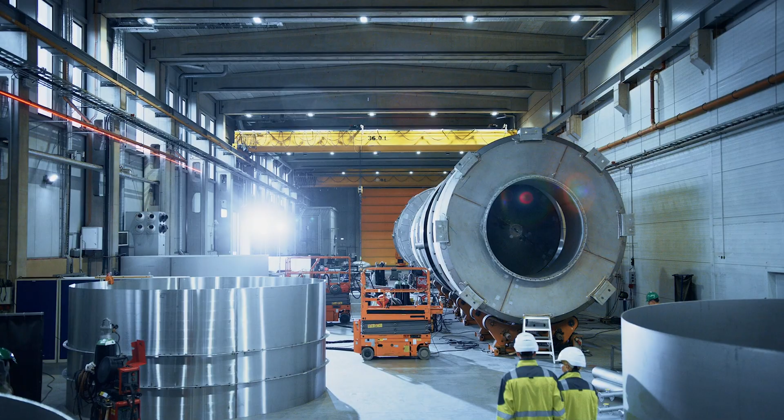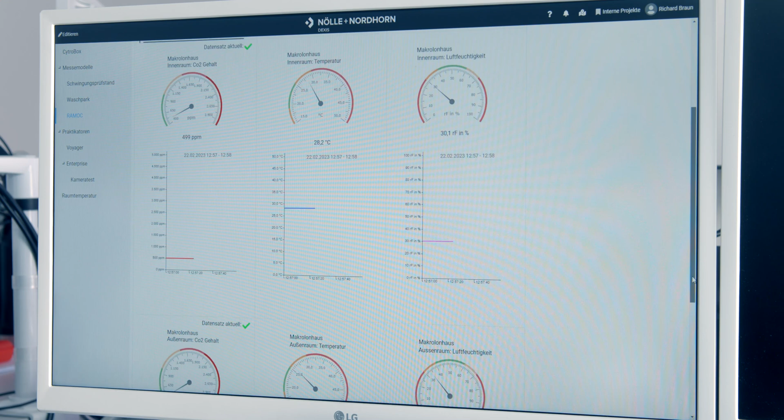Digitalization, Industry 4.0, and big data are the words on everyone's lips. But what really happens when massive amounts of process data are analyzed in companies? If you want to efficiently exploit the potential hidden in all this flood of data, first of all, you have to structure its recording and storage. Only then can a conclusive analysis be conducted.

It is exactly to this end that Nölle Nordhorn have developed their digital measurement data acquisition system, known as DEXIS, which has gone on to achieve first place in the Telekom Digital X Awards in the Digital Products and Services category. The Digital X distinction, awarded by the German Telekom in collaboration with the Federal Association of SMEs, is conferred on the most spunky and most innovative digitalization and transformation projects to come out of German small and medium-sized enterprises.

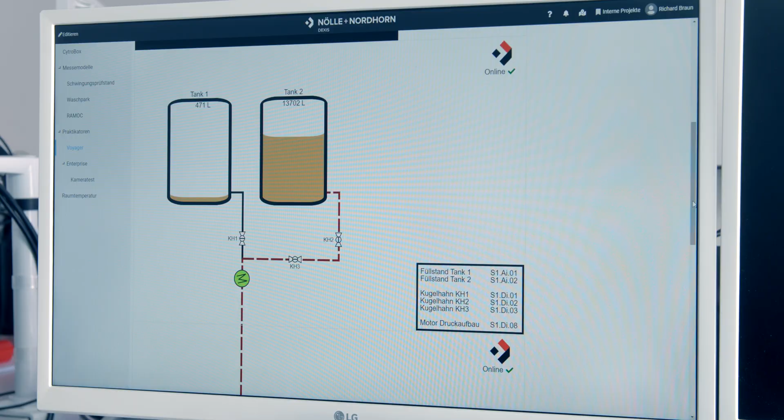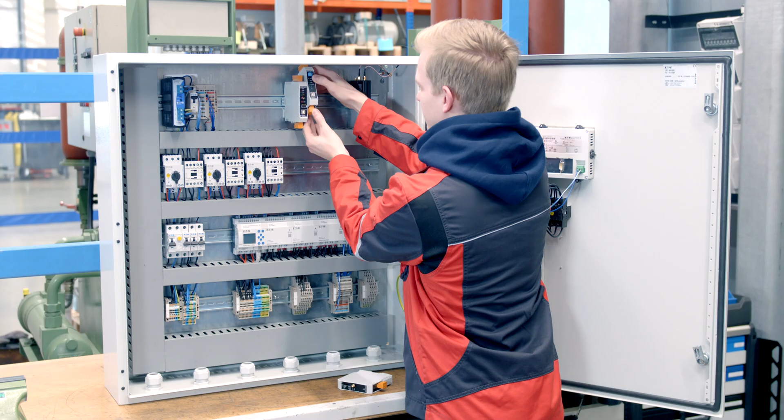The specific aim of DEXIS is to optimize all resources which are used by implementing transparent processes and their associated cost savings. The DEXIS Master Module and the Extension Modules all have digital and analog inputs, and the great thing is that signals can be looped through by the modules, which means they are available for other applications. Sensors that are already present, or any new ones, can be connected to the inputs.

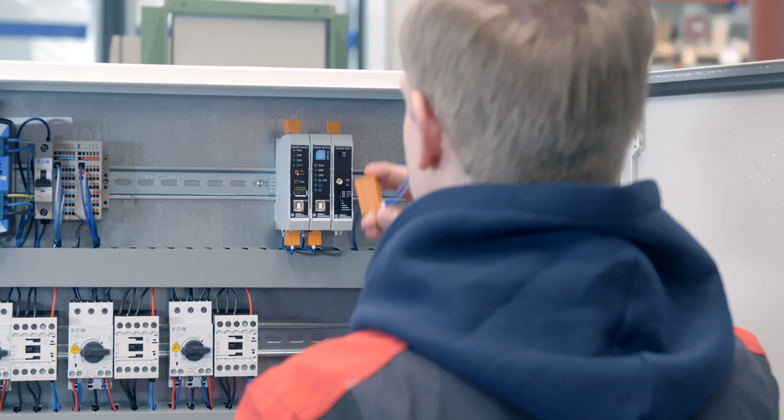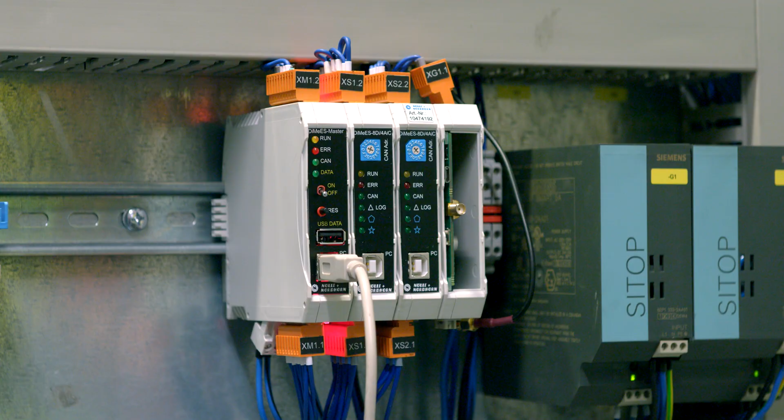The DEXIS GSM module can then send data in an encrypted format to a cloud computing platform. Data transfer is carried out using M2M, machine-to-machine SIM cards, provided by Telekom, a system which guarantees maximum data security. In this way, encrypted data transmission can take place independently of any company network.

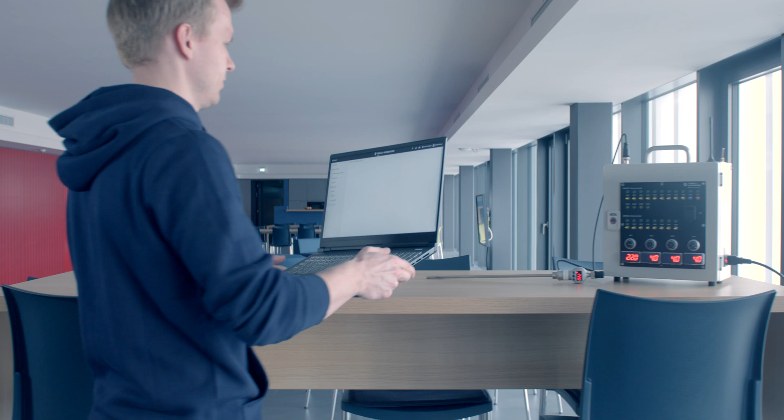Let's begin by taking a really simple example. We have used one single temperature sensor to record the temperature profile in our own canteen. The graphic analysis of the data can be individually customized.

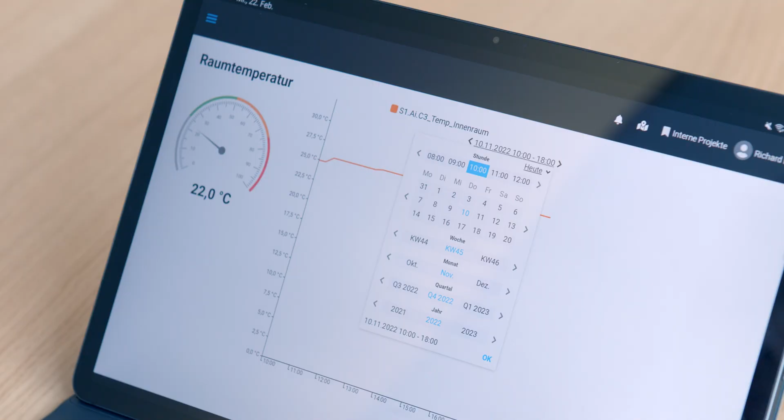Do you notice anything about the temperature curve shown here? Yes, you're bound to have seen it. Towards evening, the temperature suddenly begins to rise, although the room is no longer being used. This waste of heating energy would never have been noticed without DEXIS.

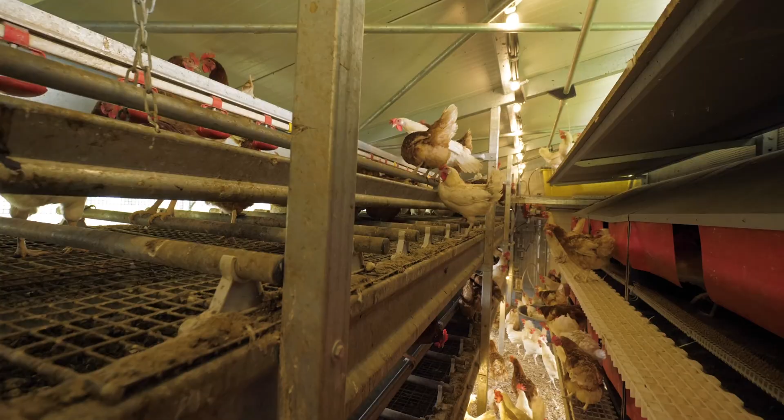Another example of how DEXIS can be used is shown by the mobile stable supplied by the company of Wördekemper GmbH in Rietberg, Germany. A high degree of automation here sees to feeding, to the weather-dependent ventilation system, to the operating of the egg-laying, egg collection belt, and to the opening of the hatches, to name but a few actions.

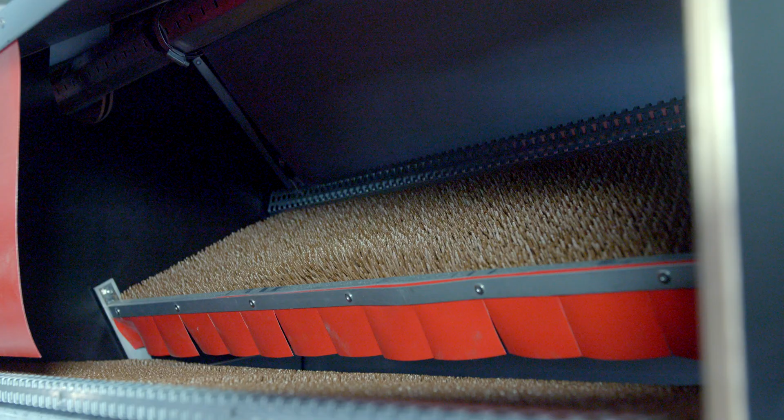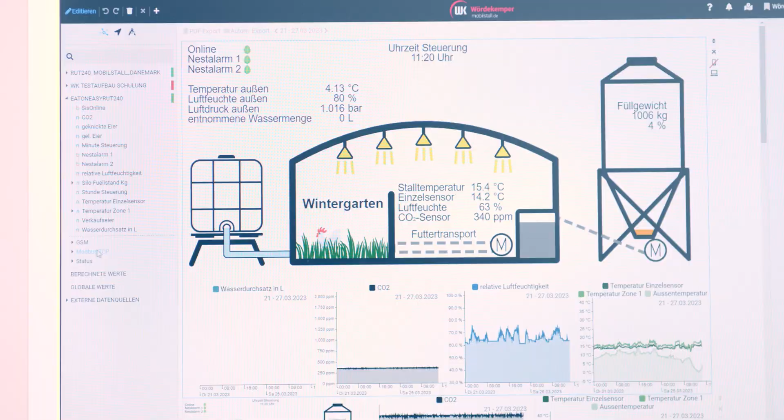Because all the sensors monitored are already present in the control system, only one radio module with the DEXIS software is included in this control cabinet. The module allows access to all variables within the control system and sends the selected data in encrypted format to the cloud computing platform. Such information also includes water consumption, which is recorded via this water meter.

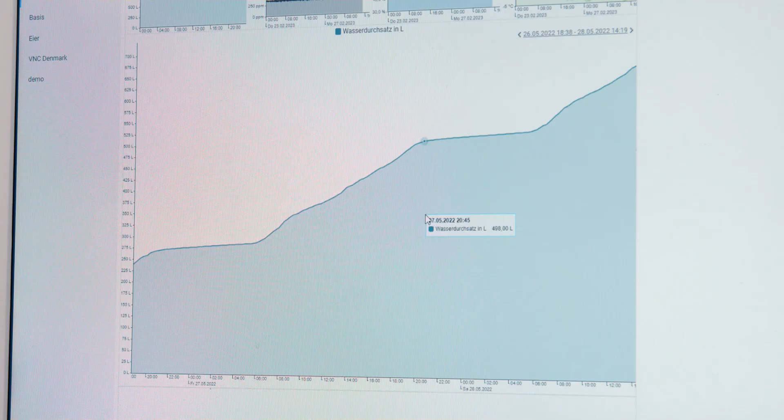The consumption curve reveals a typical pattern, illustrating day use and night consumption. Any discrepancies can then be noted to send warning messages direct to a mobile phone, for example by using push notifications. All this enables the poultry to be well looked after.

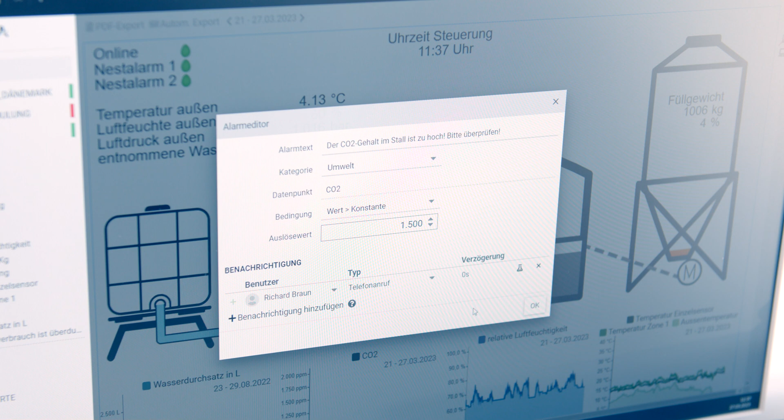A combined sensor is used for the monitoring of air quality, and the CO2 value is used for the controlling of ventilation in the chicken house. Here too, DEXIS can send a warning message if the said value remains too high for too long.

The CO2 content of the air in the stable is too high. Please check.

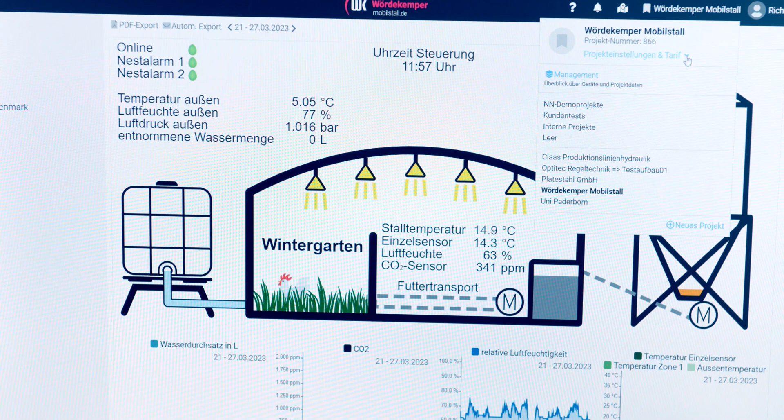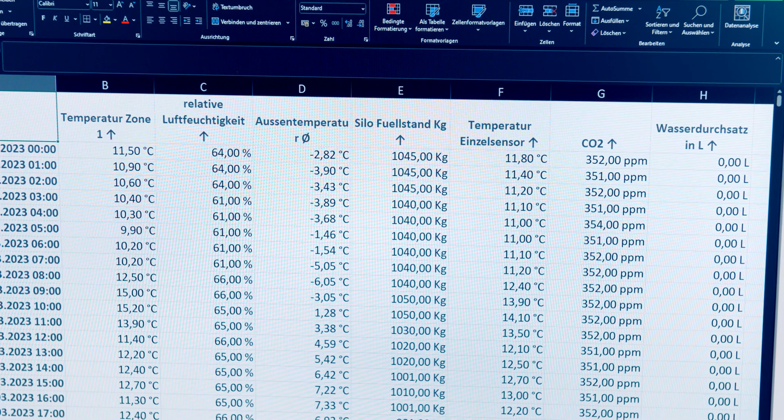The evaluating of all this data enables the farmer to see at a glance whether everything in the mobile stable is running as it should. Documentation required within the agricultural community and all other certificates for associations such as Demeter and Bioland can be automatically drawn up with the assistance of DEXIS.

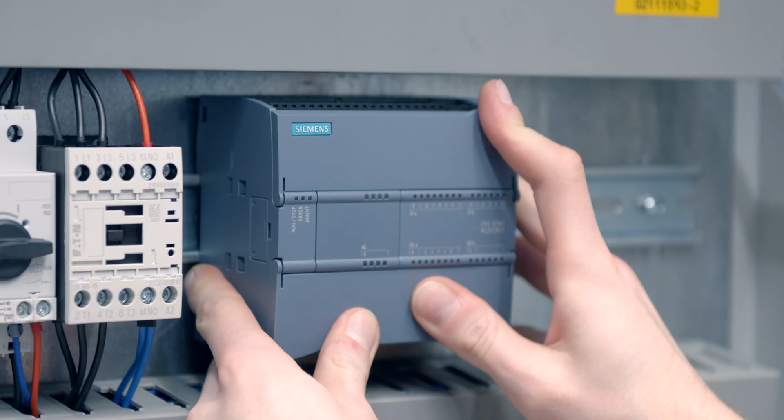The development of the DEXIS software has enabled the exchange of data between different systems, a fact illustrated by the following example. Orders at Rala come direct from SAP software. This company manufactures industrial hoses complete with certificate. All industrial hoses are subjected to test procedures, the results of which are logged.

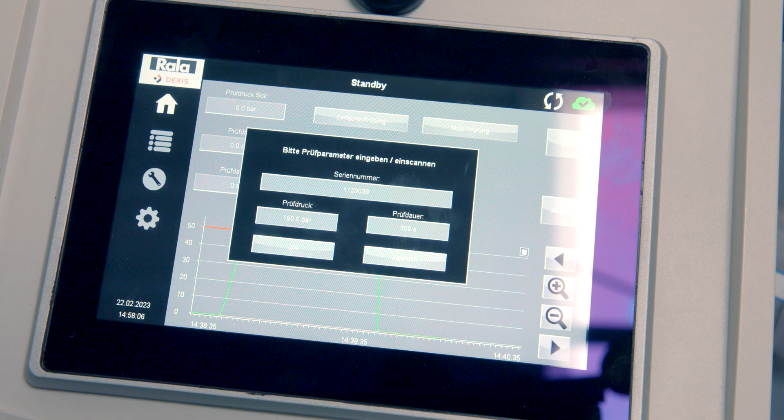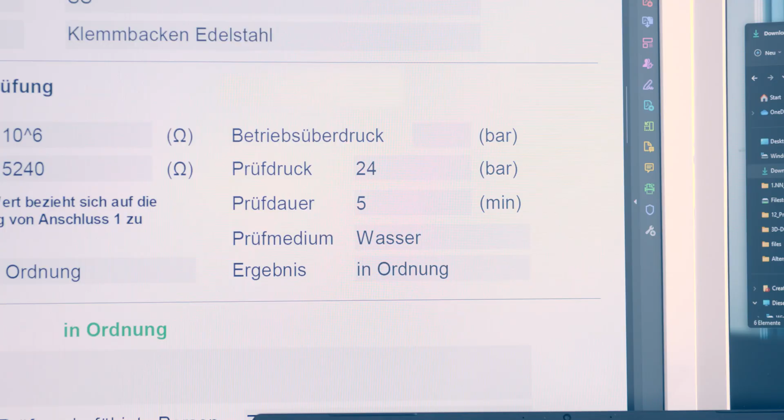The job order specifications are sent direct to the control system of the testing facility. DEXIS serves here as the interface for the exchange of data. The tested values are then sent back to SAP. The test report is automatically set up and saved in a product data record. With DEXIS, the entire process, starting with the order through production, right up to dispatch and invoicing, is carried out efficiently.

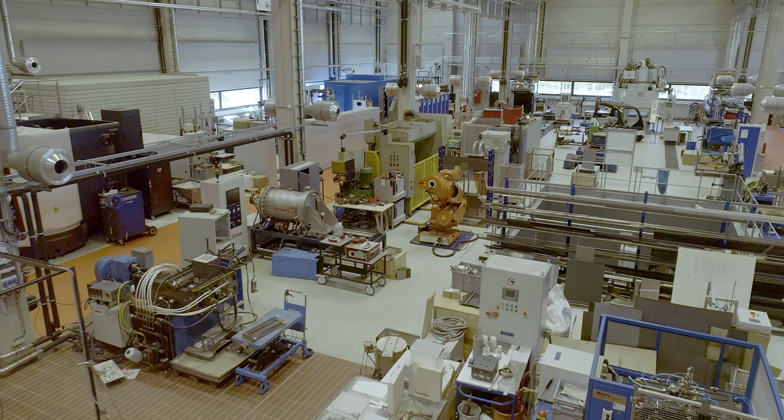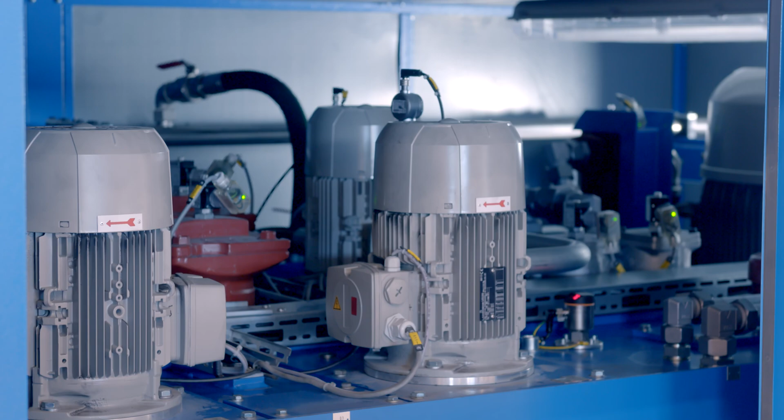In the Institute for Lightweight Construction with Hybrid Systems at the University of Paderborn in Germany, a centralized hydraulic unit provides the entire experimental hall with hydraulic power. Four 120 kilowatt engines provide the individual testing installations with power. These facilities are connected via permanently installed hydraulic lines.

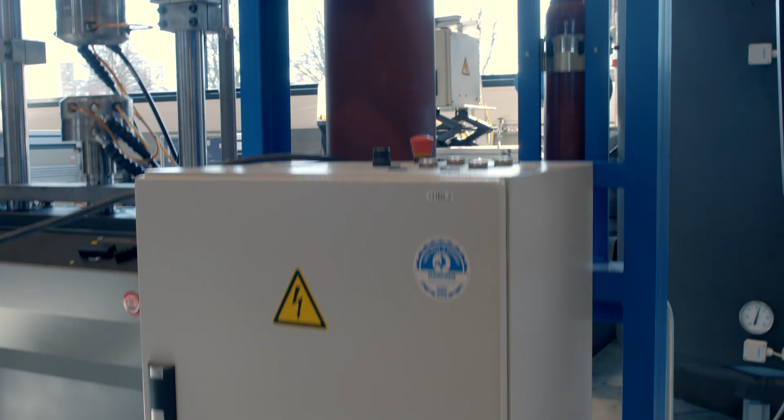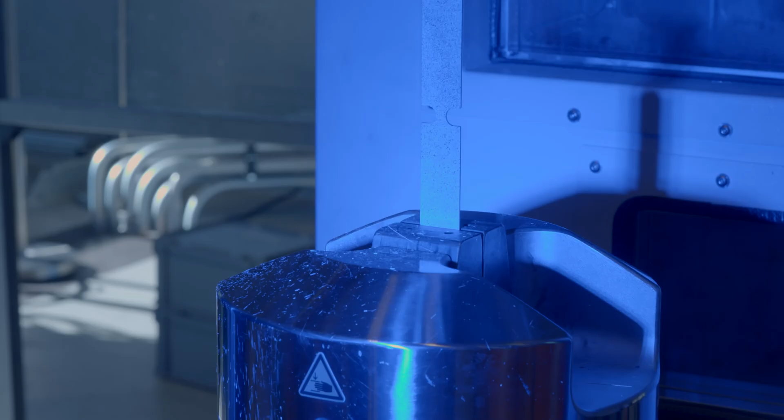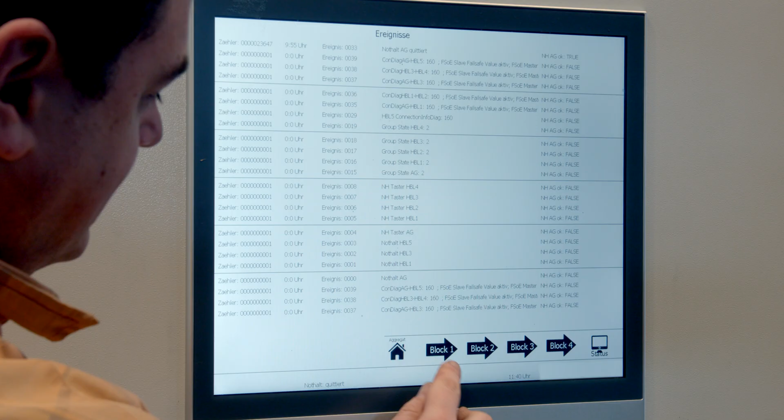Every station is individually monitored using DEXIS. This means that costs for all individual experiments can also be easily determined. In some cases, even the data of the hydraulics can be relevant for the evaluating of test results obtained from material testing. Such information is retrievable via DEXIS at any time. This procedure also makes up part of the research work. With DEXIS, Nölle Nordhorn have developed a tool which lends itself fantastically to the monitoring and analyzing of the most diverse processes.

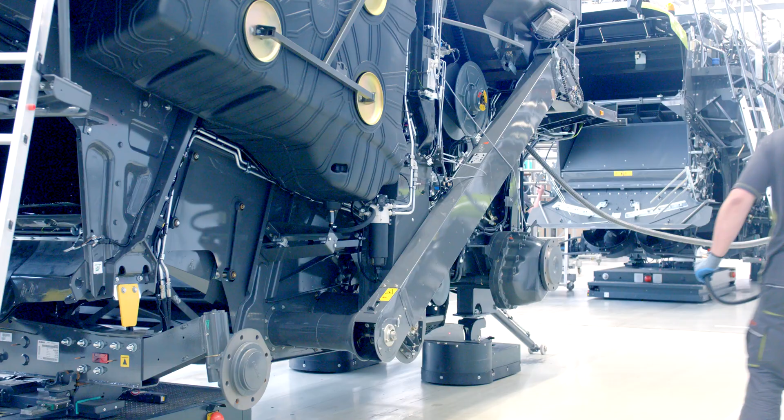At CLAAS in Harsewinkel, Germany, DEXIS is implemented for the monitoring of initial filling of their machines with diesel and hydraulic oil. Access to the data of the fuel depot allows the supplier to optimize all manner of delivery logistics in good time.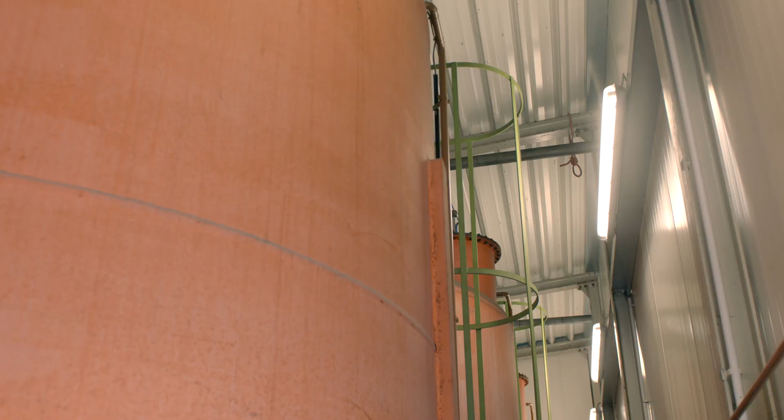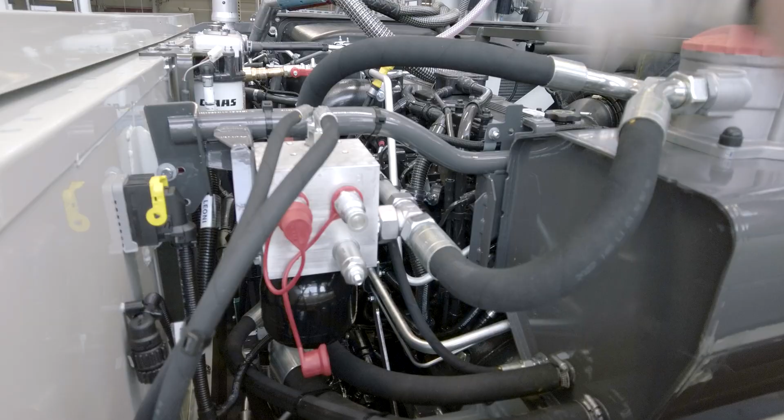The hydraulic oil that has been delivered is monitored by means of various sensors. During final assembly, the machines are refueled with diesel and hydraulic oil. The quantity used for filling up and its quality are documented and then saved in an inspection report.

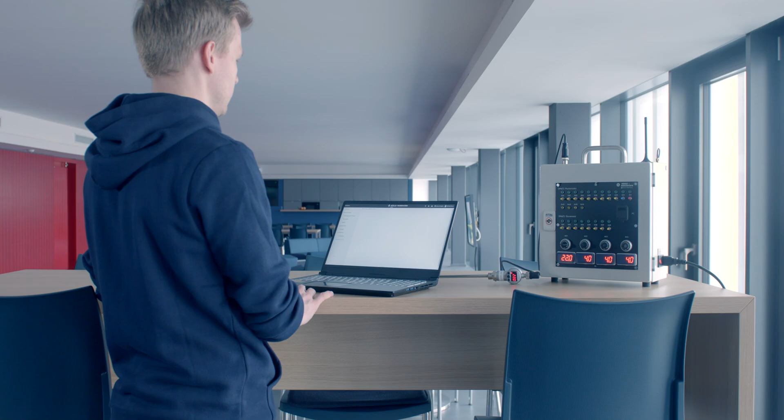So now you have seen a few examples of how DiMeES can turn the potential hidden in data to really good use and in a most efficient way.